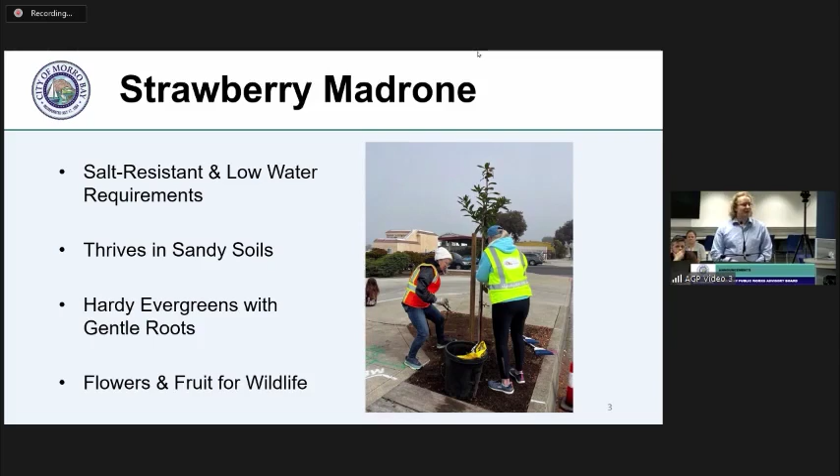I think Damaris is still here. We do have new tour dates for the wharf. Those were posted on our website and on social media. I believe the first day is already sold out. Is Damaris here? Did she bounce out for a minute? No, she's not here. So we have high interest in that. If we continue to see high interest in those wharf tours, we'll continue to put them on. It's something we're very excited about.

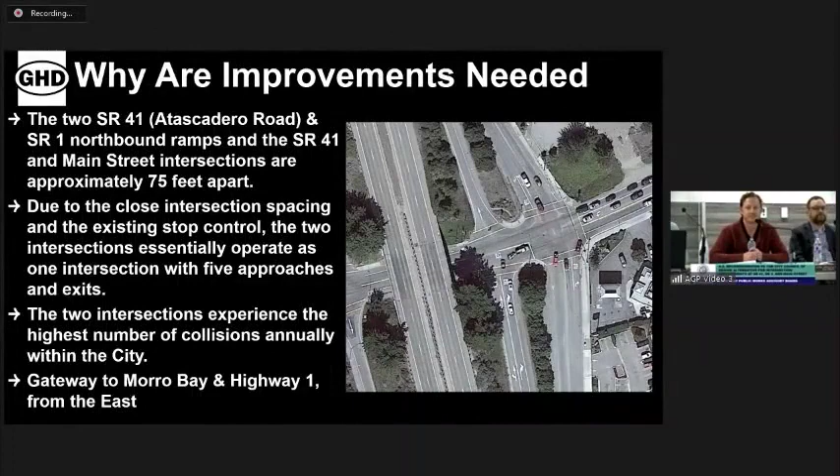Next slide. One way to measure the congestion or traffic flow through the intersection is something called a level of service. In our traffic studies, we run numbers and modeling based on existing traffic flows and growth factors for future population growth. We're able to determine if the intersection is going to function today and in the future acceptably, to move cars through it and pedestrians as well. We assign grades to them similar to the high school; A through C tend to be acceptable levels of service.

And the next slide, level of service D through F tend to back up. Sometimes they block other intersections, driveways. People are sitting at the light or the stop sign, and they start to get frustrated and take risks. You have to make judgments at a stop sign, or at the off-ramp you have to look for a gap in the traffic. When the level of service starts to degrade, you start to take higher risks. There's more cars moving around, more pedestrians, and sometimes that leads to higher levels of collisions.

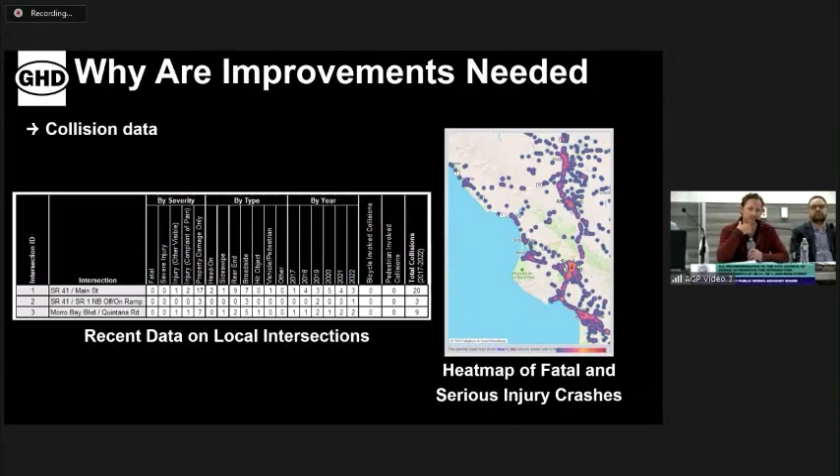And that's a heat map of the collisions around the county. If you were to zoom in, you would see a hot spot of collisions at this intersection, but in comparison to other regional issues, this one isn't necessarily as high as other areas in the county, but it is a hot spot for Morro Bay. Next slide, please.

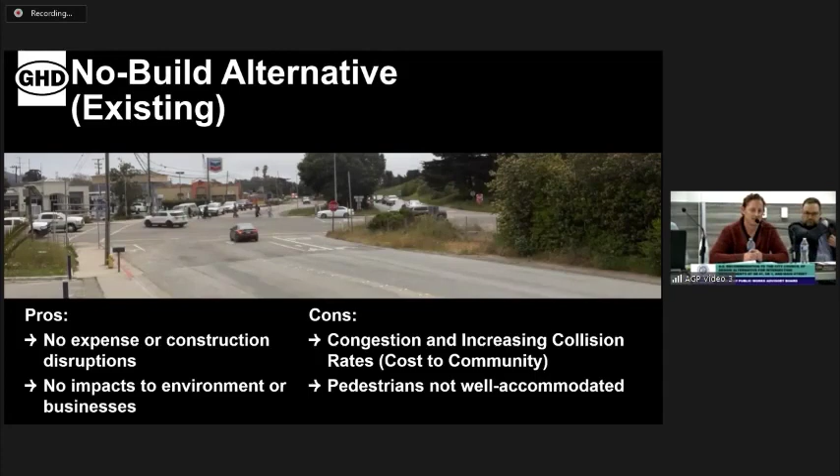So we are viewing the current intersection as an alternative. The pro would be there's no expense to leave it as is. There'd be no construction disruptions to businesses, high school students, or residents using this intersection. There'd be no impacts to the environment, like cultural resources or businesses fronting the intersection. The cons are congestion and collision rates will be increasing over time, and pedestrians don't seem to be well accommodated in the current intersection. We've heard that from the students, and I think there's improvements that would be welcome there. Next slide.

Could you get one more forward? All right, so the point here is we've heard a lot from the community about pedestrian safety. So the existing intersection—what we're trying to demonstrate is once you enter the crosswalk, you're at risk of having a collision with a vehicle. And it's a wider street crossing than you would have in either of our alternatives.

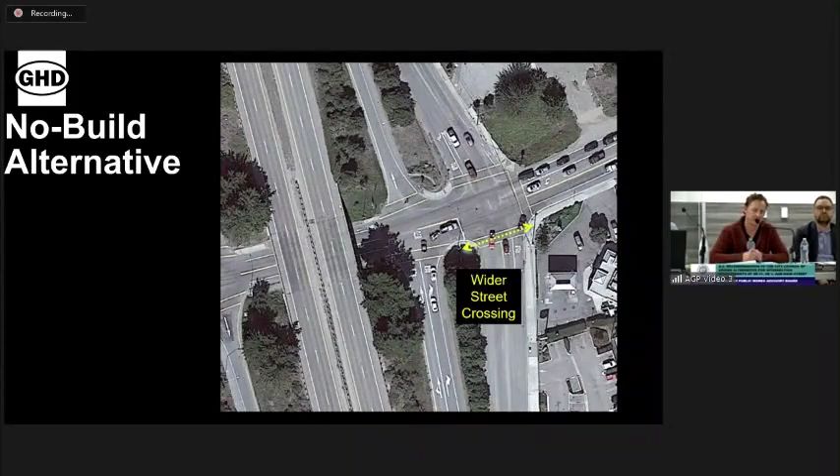And next, if you can push one more. These are the different movements that cars might interact with the crosswalk. So if you just count them, there's 5 opportunities for a car to interact with a pedestrian once they enter the crosswalk. So for pedestrian safety, this would probably be the worst alternative.

Next slide. The double signal alternative—the pros would be that, relatively speaking compared to the roundabout, it has a lower construction cost, $4 to $6 million for this improvement right now. There's less right-of-way impacts, so private properties would not be impacted as much as the roundabout, and there's less improvements needed. There's also more of a predictable traffic signal that people are used to using, driving and walking. So we do think that is a pro for this.

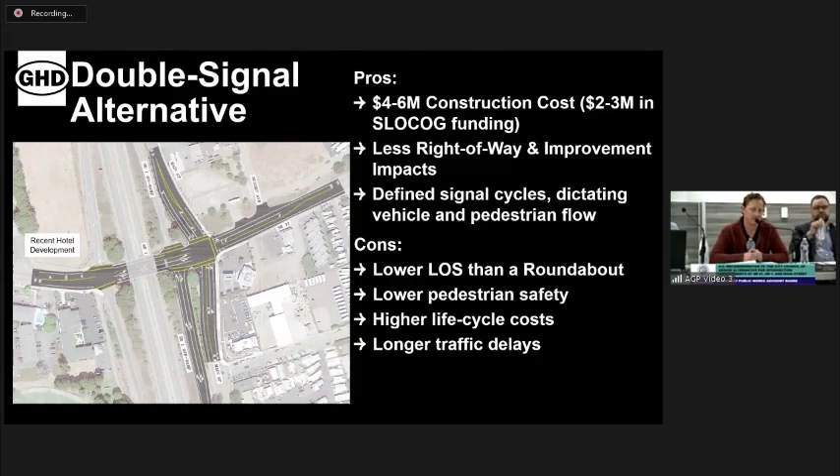The con would be that—we'll show the numbers—but it actually has longer delays than the roundabout. So the level of service is lower; in some areas, the level of service is actually lower than the existing stop sign. There's lower pedestrian safety in this alternative than the roundabout, and I'll show you that later. The life cycle costs—construction, maintenance—we also count for community costs, so collisions are part of that life cycle cost. There's a dollar amount assigned to different severities of collisions. So when you count all of those things and delays, if people are sitting there, there's a dollar amount assigned to that. So this is a higher life cycle cost for the double signal, and there's longer traffic delays. Next slide.

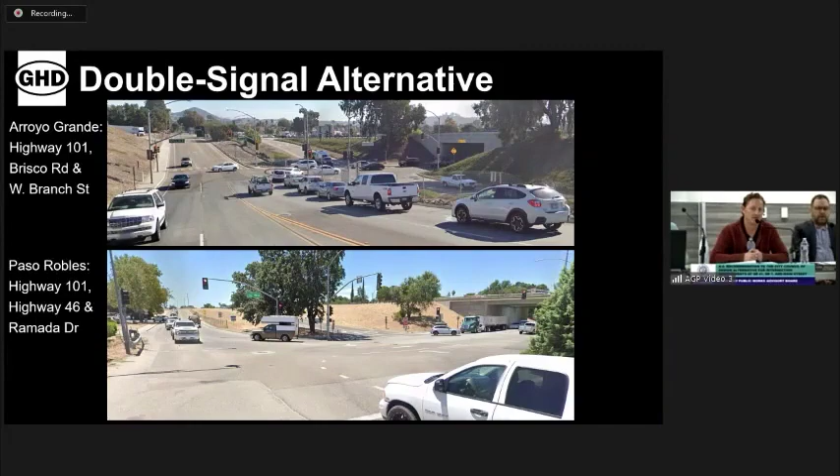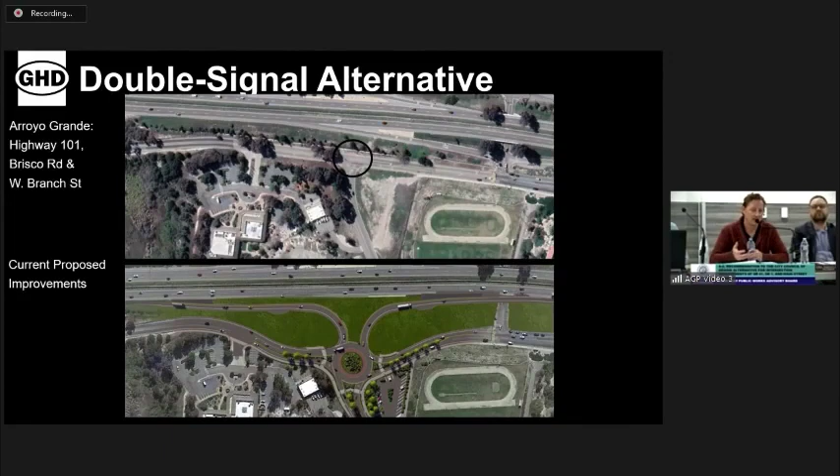In an aerial view, this is what those areas look like. They're currently planning a roundabout here to help with congestion and help with the intersection spacing issues that we have also. So the point that I'm making here is that's what it would look like if we go with the double signal. And in this area, Arroyo Grande is looking at having to improve it because of the congestion.

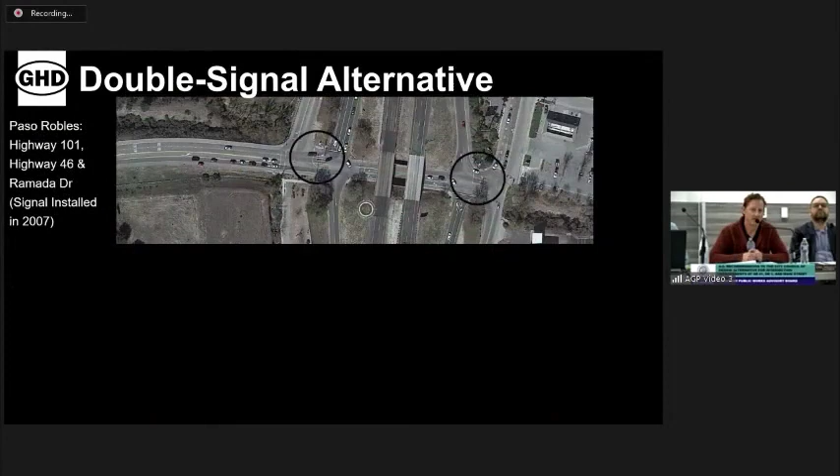So Paso Robles, again, this is the plan view. They're also looking at roundabouts to improve this intersection spacing issue, congestion, and the flow of traffic.

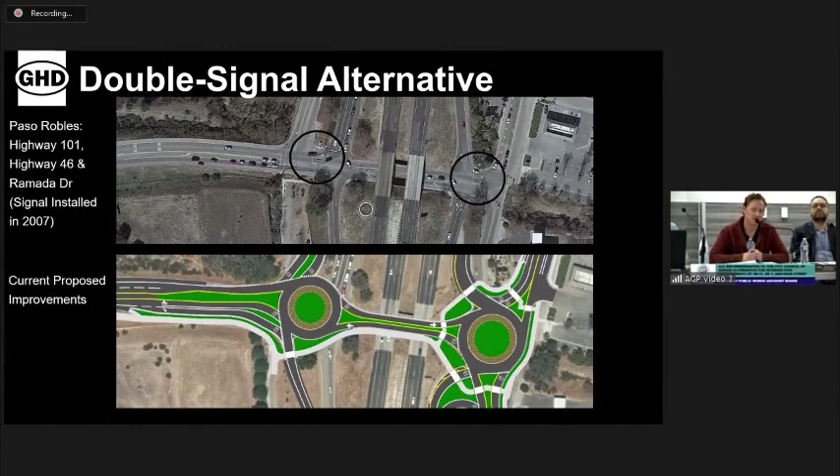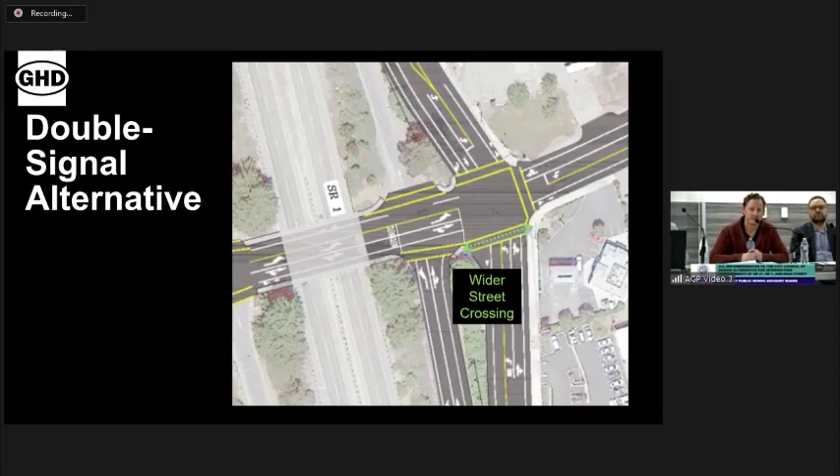For the double signal alternative, I wanted to show the pedestrian safety element. We have a slightly wider street crossing than you would have in the roundabout. And those are the potential conflicts. Once you signalize it, you have less traffic moving through that crosswalk while there's a green light for the pedestrians to cross. But you still do have 3 turning movements that would interact with pedestrians in the crosswalk.

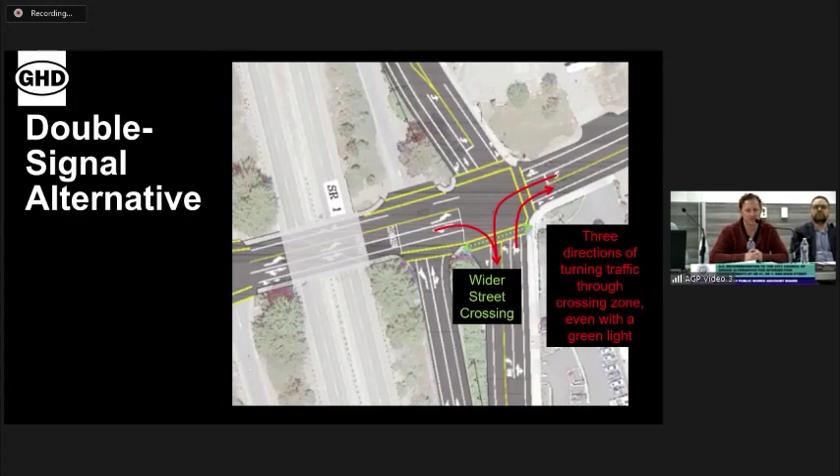Finally, the roundabout alternative has the highest level of service for traffic delays. There's less traffic conflicts than a signal, which we'll show later. The total cost for the community is actually lower. There's a life cycle cost analysis that we're required to do, and if you count the collisions, delays to the community, and maintenance, it's technically lower for the life cycle costs. Traffic delays are improved and pedestrian safety is improved. It is a larger construction cost, which is a con, and there would be right-of-way impacts — we would be dealing with the corners of this intersection and having to acquire some property to build this.

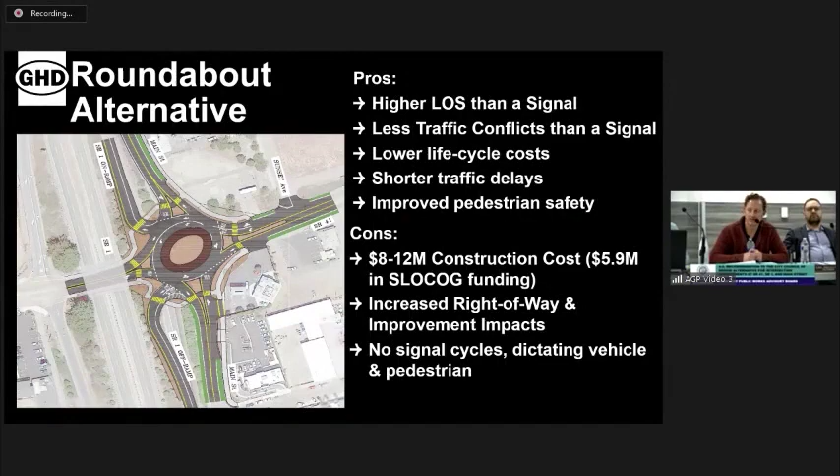Also, it's fairly innovative, even though we have one in Morro Bay. People may not be as used to driving through a roundabout as they are through a signal. So there's no predictable signal cycles for pedestrians or vehicles.

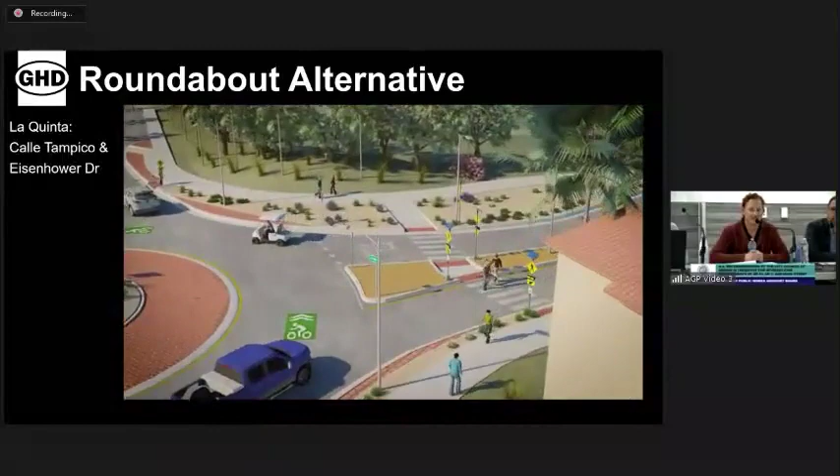This is, if you press play, a video of how one would function with cars and people walking and people riding bikes. It's about 2 minutes. So there the bike is able to exit onto the sidewalk if they choose to.

It's set back from the roundabout for the crosswalks. There's also sometimes flashing beacons to help the pedestrian safety. Bikes are allowed to drive through the roundabout, and speeds in a roundabout are actually 15 to 20 miles an hour. So it's a little more conducive to riding a bike than an intersection.

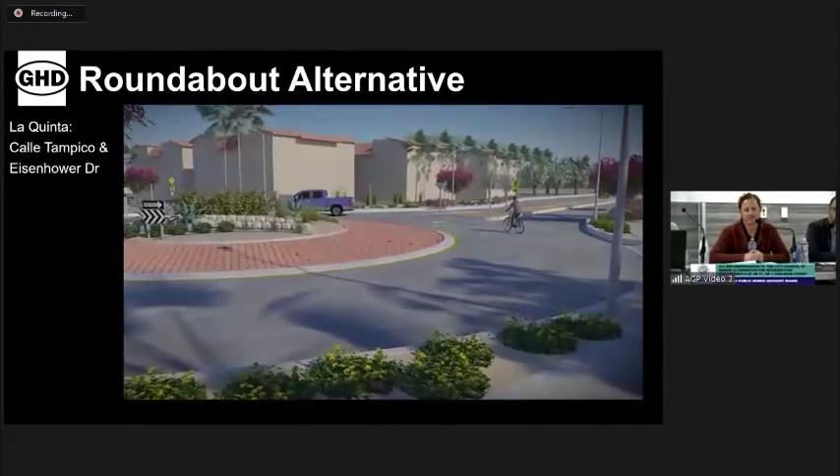All right, next slide, please.

For the pedestrian safety element, we have other statistics to show, but just from a project-specific example, the crosswalk itself that you'd be crossing is much shorter, so you have less time out in live traffic.

So it's a short crosswalk before you enter a pedestrian refuge, and it's only one-way traffic. So you only have to look left when you're crossing. You're not looking over your shoulder behind you, and you're not looking left, forward, and right at the same time. If we're concerned about high school students having focus and being safe, there's less to look for in this particular condition.

Next slide. So you get to the center of the roundabout, you can stop or you can proceed. Again, you have a shorter crosswalk distance and you have one direction of traffic.

Side note for the driver, there's also less to deal with on this, because the driver sees the pedestrian crosswalk first, then they enter the roundabout. So they don't have to be looking for cars at a stop sign at the same time they're looking for people in a crosswalk. So the driver has less to process as far as a decision goes.

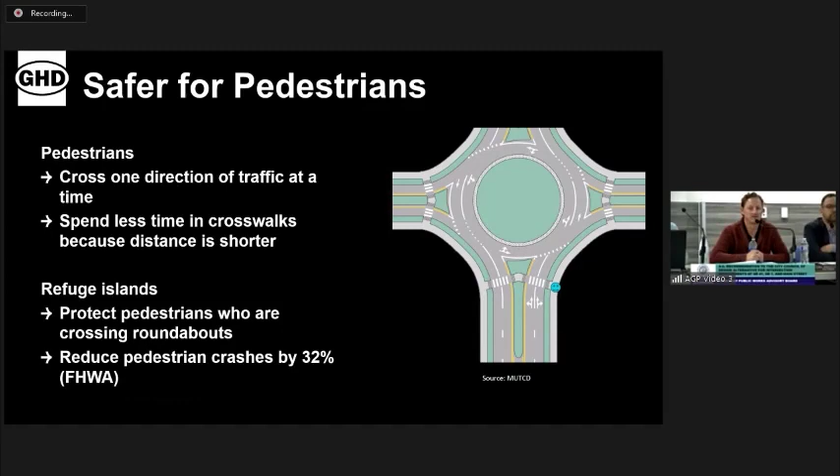Next slide. A little more serious topic is actually fatalities. The typical intersection speeds are between 30 and 40 miles an hour when you have a green light, and the chances for fatalities is between 40% and 80% at that speed if you were to hit a pedestrian.

The roundabout speeds are typically between 15 and 20 miles an hour, so if there were a pedestrian collision, it's about a 20% chance of fatality. So it's just lower chances for fatalities.

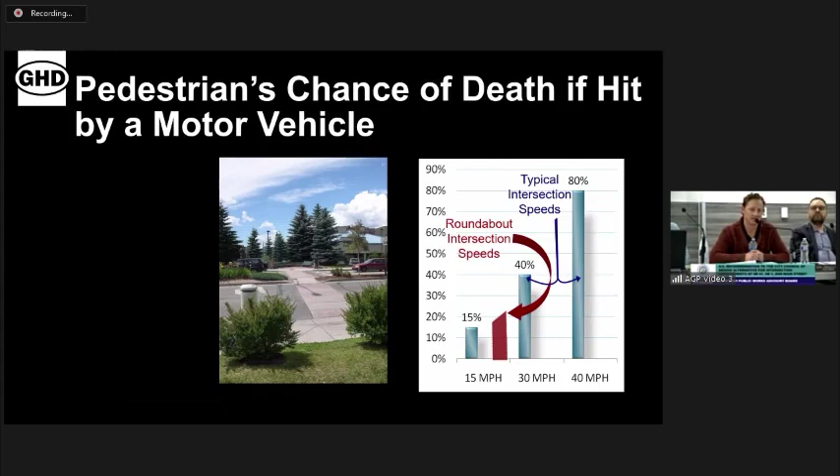Next slide, please. These are the life cycle costs that we modeled for the project. As I mentioned, the collision costs do weigh into this quite a bit, and so do the delay costs. The project costs themselves are there to the right, and then if you add them all up, there's other smaller costs like environmental for idling traffic, maintenance, and fuel.

If you add them all up, the existing no-build alternative is ranking higher than both of these. The roundabout and signal are fairly close together, even though there's more initial cost with the roundabout. Next slide.

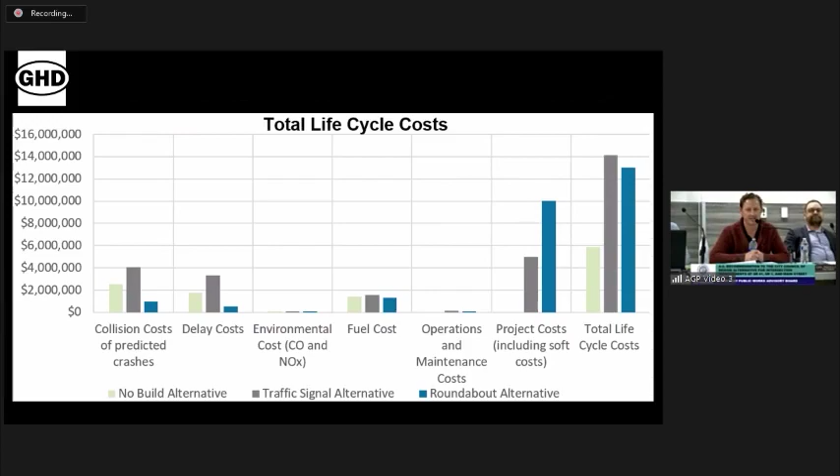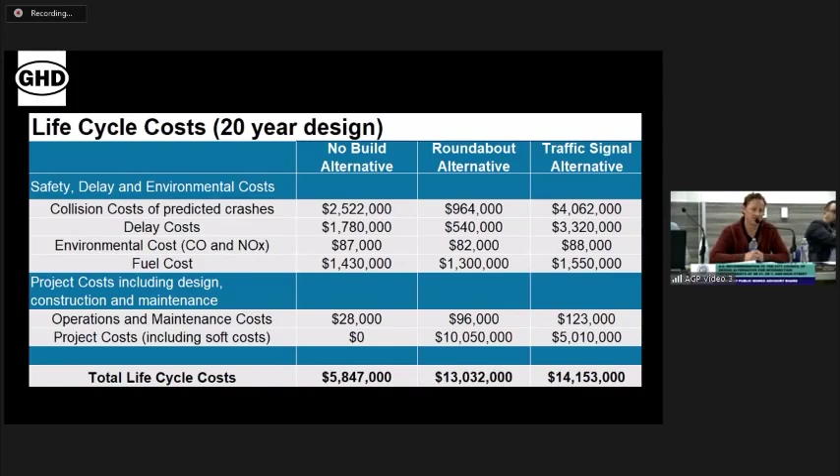These are the specific numbers for each, but you're close to 6 million for life cycle costs if you leave the stop sign as is and accept the congestion and safety issues. The roundabout and double signal are similar, with the roundabout slightly better for an investment in the community. Next slide.

And I think that's it.

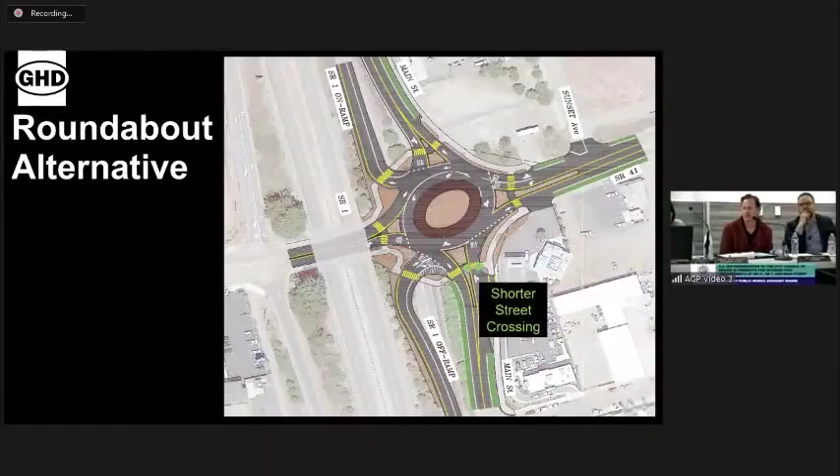Do you have any that are actually built? Yeah, in operation. It's after the questions - we have some reference slides lower in the PowerPoint in case questions came up, I loaded some reference slides. So we do have some pictures of roundabouts that have been built, that we designed to modern roundabout requirements.

And we have done one recently that was in front of a school, and there was a second one where there was a school nearby. So we met with their high school beforehand, and designed it to be safe for pedestrians. In one case, we actually created a video for the school to play to try to educate the children on how to move through a roundabout safely. This one was mentioned to us from a community member.

I think there's a couple more. This is a collage of some roundabouts we've designed and overseen the construction of, where the goal is to serve all the users, not just the drivers. A lot of these have heavy bicycle usage or schools nearby. You see one has a pedestrian plaza right next to it, and part of it is setting back the sidewalks with landscaping to help people feel safe. There are measures that can be added to cater to bicyclists that either want to ride on the road or ride on a wider sidewalk. In school areas, you tend to see flashing beacons to signify when pedestrians are crossing.

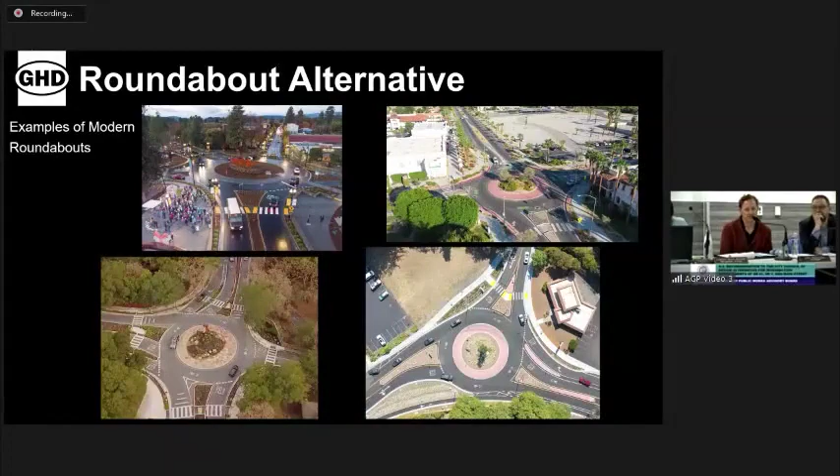So those are four of them. We have some videos too, if you guys would like to see fly-arounds of roundabouts. So what does installing a flashing beacon usually cost?

It's a good question. I worked at the county for a few years, and we did a couple of flashing beacon projects. They're a little expensive, in my opinion, more than you'd think for a sign, because of the manufacturer and supply chain. I thought it was around 50 grand per flashing beacon. About the same as a traffic signal, or a small one? I think signal poles are getting up there even higher, maybe 150 grand.

Okay, thank you. Yes, thank you.

I have a couple of very quick questions. One is just to clarify the process: is the city council the final decision maker on the preferred alternative, and will they take into account the board's recommendation as well as all the public comments and surveys you've mentioned and all the other information you've gathered through public outreach?

Great question, Chair Beal. Almost all true, that the city is the final decision maker, but on the city side only. They will take into consideration this board's comments and vote, comments made in the public survey and the stakeholder survey for the high school. All the city council members were at the community meeting, so all of those comments will work their way into their decision. However, ultimately that becomes its own recommendation to Caltrans, which has the ability to approve or deny our proposed project.

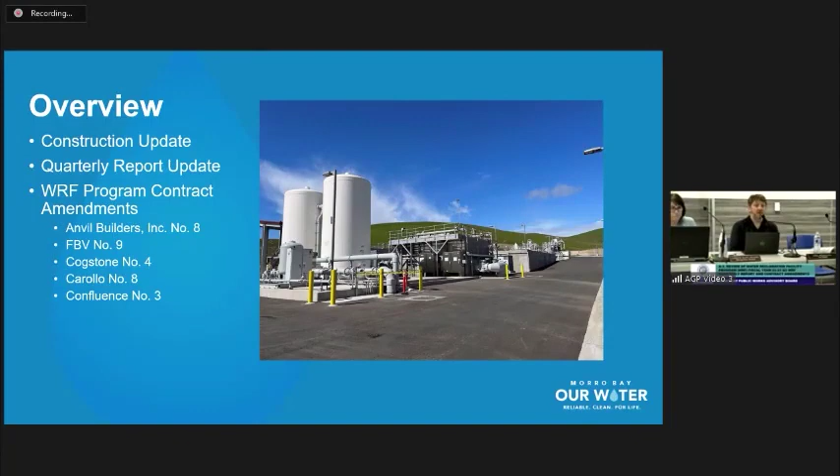We've been fielding questions about the bike path ever since, I will admit, I was wildly optimistic about its opening date, and that was my fault. So I'll accept responsibility for that.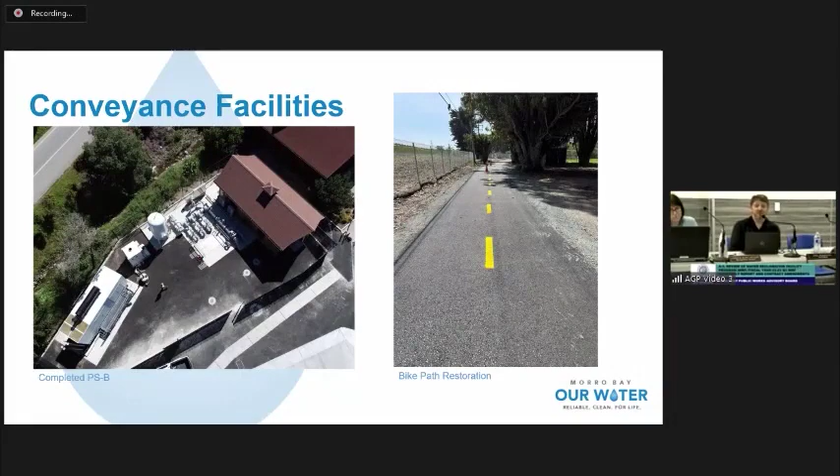So substantial completion. I made mention that both the Water Reclamation Facility and the conveyance facilities are substantially complete. Substantial completion is a contract milestone, a contract definition. It's issued when the facility is available for its intended use. That does not mean it's completely done, that does not mean it has reached final completion. What we generally have to do at substantial completion is collaborate with the contractors on what we call the punch list, which is remaining work items.

Think about this: if you build a house and you really need to get into the house, the bathroom works, the kitchen works, you can sleep in it. You don't have contractors in and out of your house, though you might during the day, you don't at night. They still have to finish the landscaping, which might be considered a punch list item, or maybe they damaged a piece of your driveway, something like that they'd fix.

So when we agree on the punch list with the contractors, we do a contract retention release. We retain 5% of every invoice from the contractor, which gives us leverage over getting the punch list done. Typically they price the work on the punch list, and then we retain 125% of the value of that punch list. We have not agreed on either one of the punch lists with either contractor yet, even though we have reached substantial completion, but agreement on those punch lists is imminent with the contractors as we work through the final details.

With substantial completion and the achievement of the operation of the biological process at the Water Resources Center, the city hosted a completion event for folks who've been involved in the project all along, and then had a community open house. I do know that plant staff has continued to host people who are very interested in the Water Resources Center and the treatment technologies there.

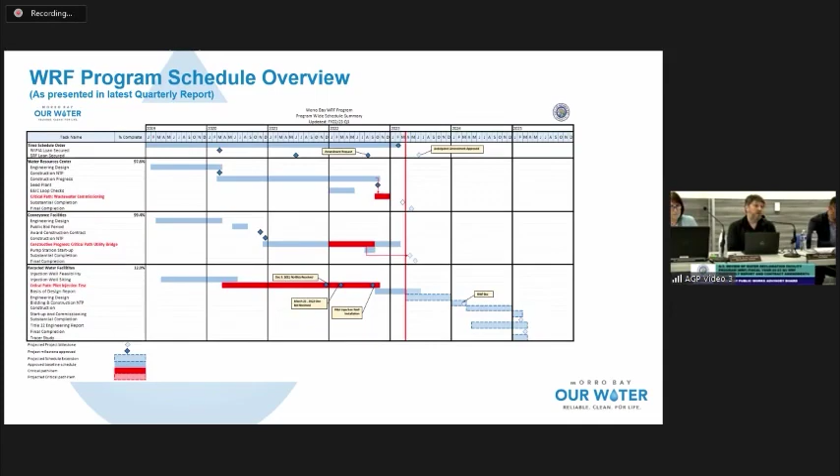Next slide, Mr. Heimel. I just want to jump in quick. Mr. Amico was correct. We do have a special meeting on Wednesday, the 24th, and that is when the WRF items will be heard by City Council.

Yeah, members of the PWAB. Yeah, just a brief update on the recycled water program. So in Q3, we completed the extended injection test.

We've probably mentioned this before, but we actually wrapped that up at the beginning of this year. And then that's when the real work started. Now that we had the injection well, we had the injection test, we ran that test for over a month, we collected the data, and now the HydroGeo team has really taken that data and dug into it.

They've updated the groundwater model. They're evaluating injection well locations, injection rates, extraction rates, travel times. They're also looking at geochemical water analysis to make sure that when we put this new water into the basin, we don't have any unintended consequences or geochemical interactions.

So that's what the team has been working on, mainly on the hydrogeo side. All that's going to culminate into what we've been referring to as the basis of design report. And that's really the plan for the IPR program, where the wells could be located, how much they're going to inject, how much could be extracted, what water supply benefit that's going to provide the city.

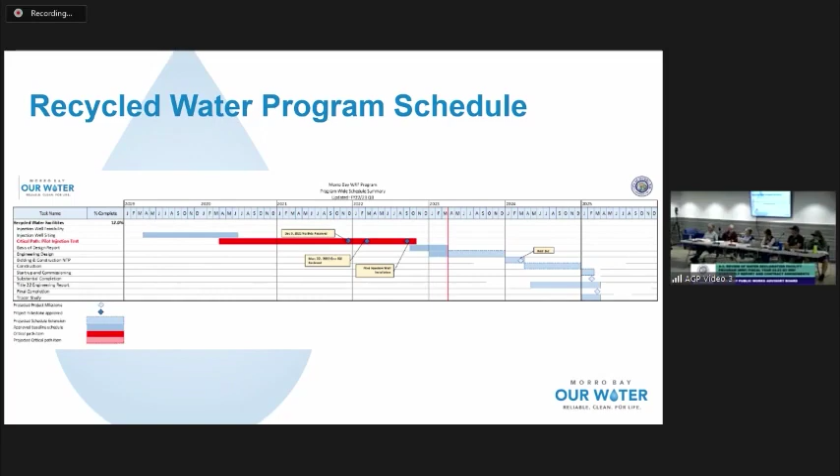Okay, so in concluding the WRF Quarterly, we're going to move into two somewhat dense slides here. The first one is a bit dense, and then the second one is a little more streamlined.

Anvil Builders, who's the pipeline and pump station contractor, as Member Nava had noted, they've moved out of town. They actually moved out a couple weeks ago and completely demobilized. So we've evaluated a lot of potential change orders here at the end of the project, and we are moving forward recommending to council... I wish I could remember the number of change orders and PCOs that we have here, but it's quite a few.

We did get questions, in the past from both the WRF subcommittee and other community members, about the number of change orders and the size of this amendment.

Yes, there are a lot. Our team works really hard and worked very closely with Anvil, and it's not unusual to have a lot of change orders at the end of a job to process a lot of changes. The big push at the end is always to get the project done. We had an unfortunate circumstance where Anvil's project manager was out on medical leave for about a month, so we lost some time with that, and then it takes some time to get through the change orders as well.

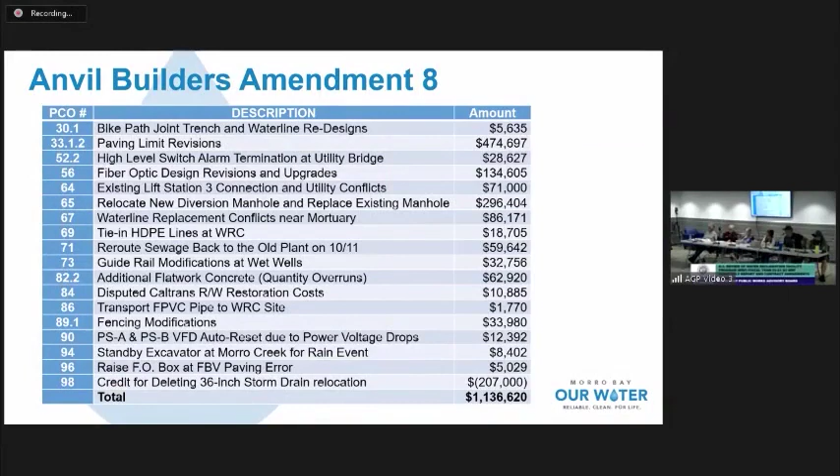There's one more slide. We have Filanc Black & Veatch. I know, I'll try to go a little faster on this. There's not as many. Okay, so Amendment 9 for Filanc Black & Veatch. This is a design build agreement, with a design build arrangement different than Anvil, which is a unit price bid.

This represents their actual cost versus the original guaranteed maximum price structure, which is they give us a price and they're incentivized through the structure to be more efficient and try to bring it in under that guaranteed maximum price. There's a provision in the contract that the city and FBV split the savings if they bring in the project under the GMP.

They are entitled to a GMP increase, guaranteed maximum price, on these, and these represent the actual pricing. There are a few more PCOs we have not authorized them to do yet because we're nearing the end of the job, and we want to take those through a more robust approval process through the city than this, because we're right at the end of the job. Increasing the GMP oftentimes just means they get a little more breathing room to bring it in under and get those shared savings achieved. So, yes.